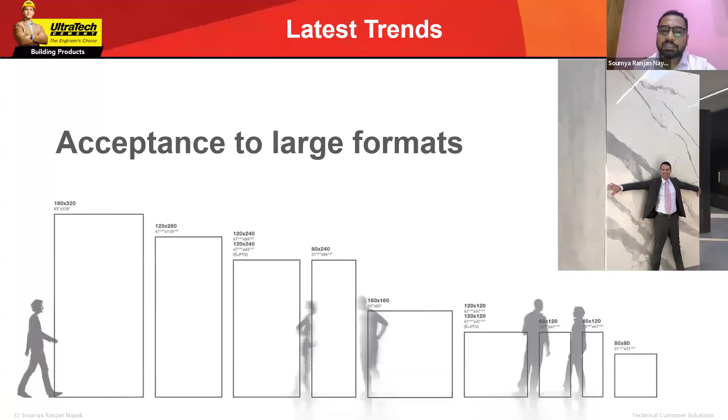So nowadays you barely see a home without tiles. Every second home constructed is now using tiles. So this is very important. We should know what our IS standard suggests for fixing these tiles and stones. So before that, we should know what types of tiles are available in the market.

So there are ceramic tiles which are very absorbent in nature for water. Then porcelain and vitrified tiles, they are non-absorbent for water, absorbing almost below 3% of water. Then glass mosaics, you see, these are the small glass mosaics, and they come with a traditional fixer to fix them. Let's take a laser. So presently these types of tiles are available in the market. For better understanding, I am giving you a view with glass. So glass is zero absorbent for water.

If you compare with ceramic tiles, they are mostly made of clay, so they absorb water more than 10%. But in case of vitrified tiles, they will absorb water less than 3%, almost non-absorbent.

So why am I elaborating this? Because we need a different kind of material to stick these tiles to the substrates. If a material is non-absorbent in nature, we require an adhesive capable of sticking this non-absorbent material to your plaster or any substrate where you want to fix the tile or stone. And if you see bricks and similar materials, they are very absorbent in nature, so we use cement mortar to fix these things. But when we come to a non-absorbent material, like a Sunmica board or plywood, they cannot be fixed with cement because they are very non-absorbent. Similarly, these tiles are also very non-absorbent, like vitrified tiles and porcelain tiles.

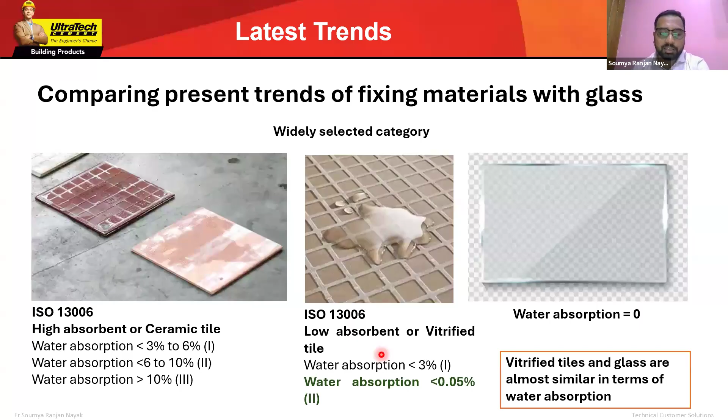Then obviously there are different types of stones available in the market - normal quarry stones, and there are composite stones also. We use different types of polymer or plastics or modifiers mixed with stone dust to give a composite kind of tile and stone.

Nowadays, the construction industry demands the fixing of tiles and stones on every kind of surface. Previously, as you saw and as we experienced, people used to fix tiles and stones only on cement surfaces, like plasters and concrete. But now, the construction industry demands that these tiles and stones be fixed on a plyboard, a metal board, an aluminium board, or a wooden surface. So we need different kinds of adhesives for this - we cannot say we will fix all these things with cement, because that is not possible.

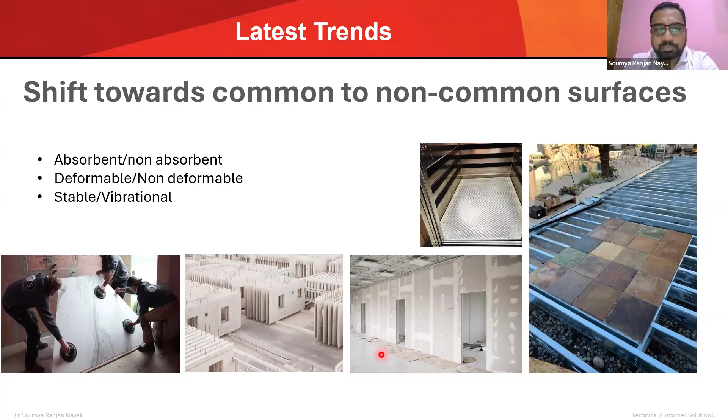So now you see the latest trend of tile fixing is like that. People are fixing tiles everywhere, in exterior, in interior, in any dimension. There are tiles like 10 feet by 6 feet - this kind of big tile is being used in construction nowadays. So for that we need a better solution and a modern approach.

Saying modern approach and better solution, we also have to look into cost effectiveness, because anything without cost effectiveness and durability is not a modern solution for now. If you see, we sent Chandrayaan, we sent Mangalyaan, and we placed it at a much lower cost compared to the Americans, Russians and Chinese. So what we need is a modern approach with durability, which will eventually be cost economical for our customer.

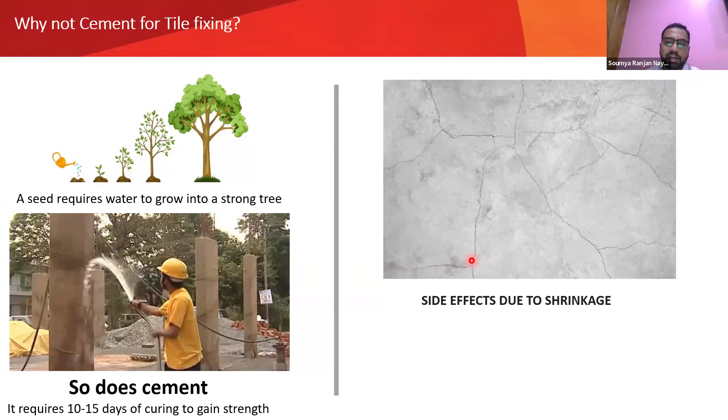So why not use cement in tile fixing? Because cement requires curing. When we do a plaster or concrete work, immediately after that we have to do 7 days or 14 days of curing as per the requirement of cement or concrete. If you don't do that, you will not get the desired strength, and in case of cement, we will get shrinkage cracks and other issues. So when we fix tile with cement, we are not able to cure it properly, and eventually it will lead to shrinkage cracks and other problems like hollowness, and we will not get the desired strength and adhesion. This leads to these kinds of challenges.

When you use only cement for tile fixing, you are not able to cure it properly because you apply tile on the cement or stone on the cement. So due to lower strength and shrinkage, buckling happens, and due to shrinkage and cracks in the cement layer, cracks eventually develop in the tiles. Due to gaps and hollowness in the binding material like tile adhesives, dirt enters into the gaps and into the white marbles and tiles. If the cement does not achieve its desired strength, our tile and marbles will debond, and we don't have control over shrinkage. If you don't cure it, this kind of lipping issue happens due to improper strength and shrinkage - hollow sounds occur, and from that point tiles and stones will crack, and due to gaps, water enters and efflorescence happens.

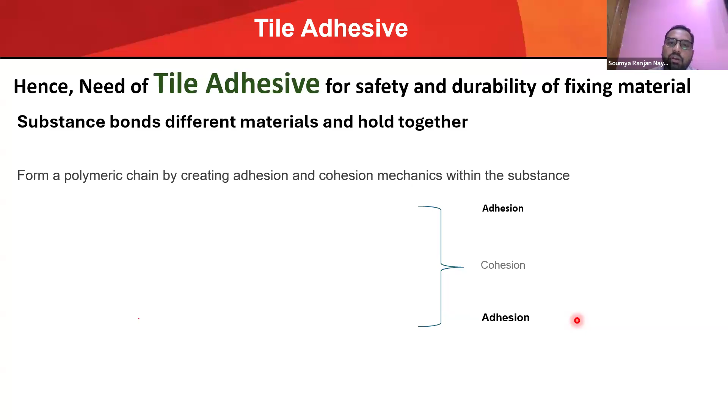our engineers must use tile adhesives for durable and more safer construction. Also, needless to mention that it will enhance the aesthetic of the building or construction.

And when I say tile adhesive, we will go into details. What happens? Tile adhesive will give an adhesion between the substrate and the tile.

Tile adhesive is a material which has a self curing technology. We know it requires no curing. Also,

it has zero shrinkage property. What happens? It will adjust its shrinkage at the time of hardening.

So that means at the time of laying the tile adhesive fresh, and when the tile adhesive gets hardened, the area will not shrink. The tile adhesive at the time of application, the area tile adhesive covers, it will remain the same.

Unlike cement or concrete, what happens? Cement or concrete somehow shrinks after 24 hours or after 12 hours. But tile adhesive, it will not shrink. At the time of application, the area it will cover, until the end it will cover the same area, it will not shrink.

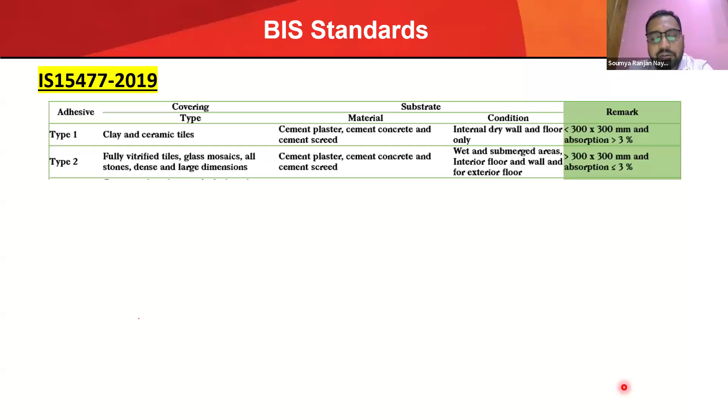so for type 2 tile adhesive, it says it will be applicable for tiles greater than 300mm,

and it's for vitrified tiles, glass mosaics, stones, and large dimension tiles in interior floors and walls and exterior floors.

I think... yeah, and exterior floors. So this is the exterior floors.

I will give examples like balconies and chajjas. These are exterior - sorry, like balconies are called the exterior floors.

Like verandas also, where the roof is there, covered floors. Okay, we can use type 2.

For type 3, it's the same kind of area we can use, but it allows for both external and internal walls. This is for all ceramic, clay, vitrified glass mosaic, porcelain tiles, and all natural stones. For sizes greater than 300mm, you can use this, but it should be less than 600mm for type 3. Type 3 is the kind of tile adhesive commonly used in regular construction, like institutional and individual house builders, because it's an all-purpose tile adhesive. You can paste tiles and stones in exterior and interior applications.

Let's see what our IS code says about these deformable tile adhesives. There are S1 and S2 types. S1 says the tile adhesive can deform from 2.5mm to 5mm. Type 1, type 2, and type 3 tile adhesives have a deformability between 1 to 2.5mm, which can differ. But type 4 must have a deformability capacity from 2.5mm to 5mm, which is S1. For type 4 tile adhesive having S2 deformability, it must show a deformability of greater than 5mm.

Then comes type 5. From type 1 till type 4, all these adhesives are meant for cement and dry substrate. But type 5 is meant for wooden, metal, plyboard, aluminum, stainless steel, mild steel surfaces, like in lift areas. In some constructions we use steel staircases - if you want to fix tiles or stone on a steel or metal staircase, we have to use type 5 tile adhesive. Till type 1 to type 4, all are cementitious tile adhesives.

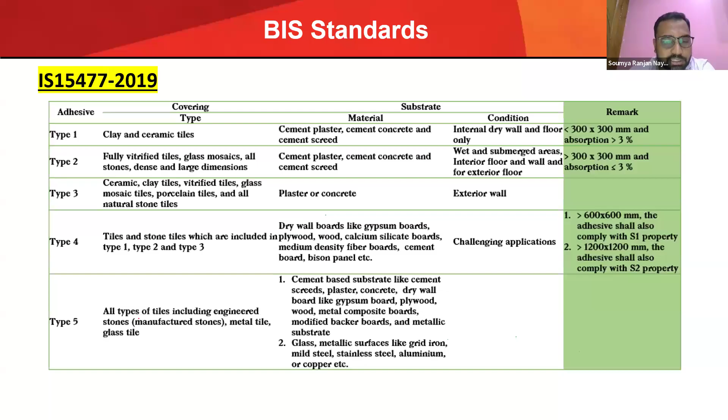I rather emphasize that we should know what are the types of tile adhesives as per IS code and what are the different applications. We must know this, because every construction or building is now using tiles and stones, and it's important that we suggest proper building materials for a better and durable construction.

Also, in some big projects they follow European norms, EN code and IS code. But now ISO is also there, though maximum construction has now moved to IS 15477. These are the synonyms summarized here. C1 is normal cementitious, C2 is improved cementitious.

There are some properties that must be there in tile adhesives, like slip resistance. Slip resistance means when you apply tiles, it will not slip. When you apply a tile on a vertical wall, it will not slip. If it will slip, it will be below 0.5 mm. That's the typical nature of a thixotropic material.

Let me take the laser pointer. Yeah, this is the slip resistance. It means when you apply a tile on a wall, immediately after application, the tile must not slip more than 0.5 mm. It's very difficult to measure with the naked eye, but this is the criteria a tile adhesive has to maintain.

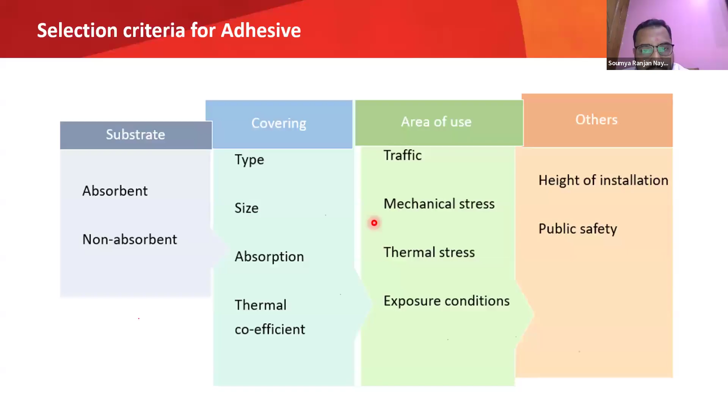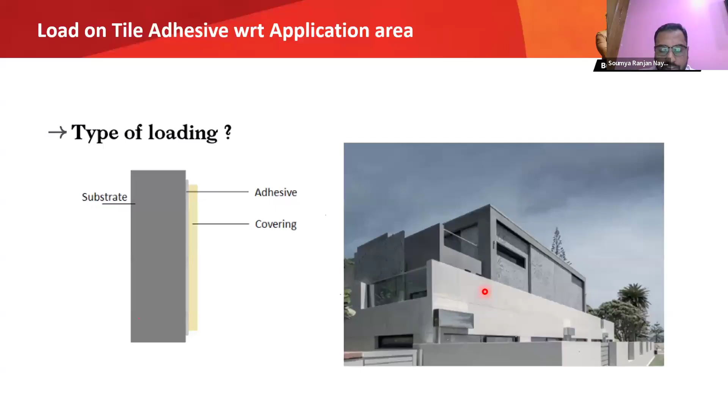Before that, what I told you, what our BIS standard specifies, is the types of tile adhesives I mentioned earlier. Now I am showing you what BIS certifies - what is the minimum tensile adhesion and shear adhesion that will be there. So for type 1, in dry condition...

The 0.5 Newton per square millimeter will be the tensile adhesion, and for shear it will be 1. For type 2, dry and wet condition it will be 1, and shear it will be 1.25. You can also see here heat aging condition and wet condition. So from these things, as per our requirements, we can choose the type of tile recommended by the BIS code.

I will show how we do the testing for this adhesion. Generally, the open time testing is done by only fixing the tiles, and after 30 minutes we will see how the tile adhesive is in workable condition or not. So as I earlier mentioned in the BIS code also, these are the direct words from our BIS code I am showing here.

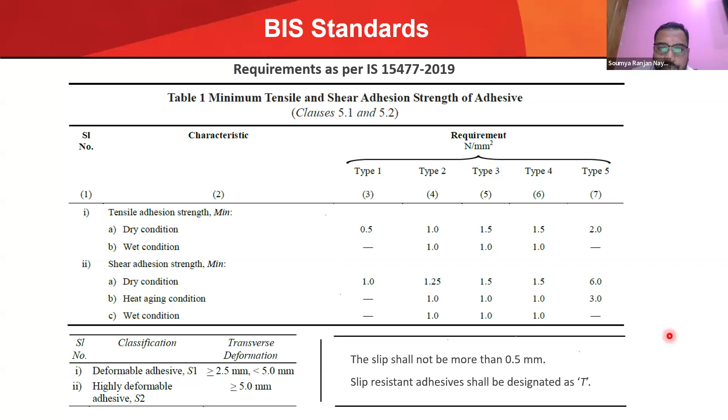Yes, these are the notch trowels. If you can see here, this is giving a more clear picture. See, when we run this trowel, it will give this kind of notch. It will help to lock the tiles in the substrate. Okay.

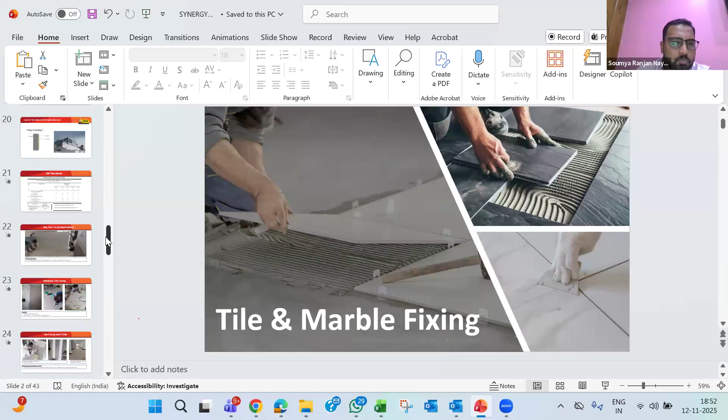So big tiles are now being used, and if you see in the middle picture, in the gaps between the tiles, we fix the spacers and fill the gaps with epoxy tile grout. These are heat resistant, water resistant, and chemical resistant. They are also food grade.

So what happens? It will resist any kind of chemical, dirt, or water entering the substrate, like your floor. It also works as an elastic membrane between tiles, so it also takes care of the expansion and contraction of tiles and stones. These are the tile grouts in between. Tile grouts come in different colors; you can choose any color as per your requirement. Here he is using this golden color. Okay. Now I'm showing a video.

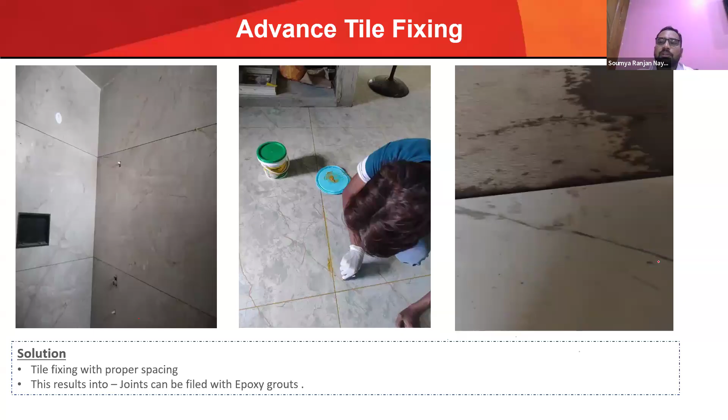So I am showing some projects. This is a Marriott hotel project. This is a Ram Mandir in Bilaspur, a famous mandir which recently opened during Durga Puja, and one of the Shankaracharyas came for 3 days here. Here you see a polyurethane type 5 tile adhesive used to fix these aluminum panels on the walls and tiles.

Here there are different types of stones written with Ramcharitmanas and Hanuman Chalisa and all these things. They are fixed upon the white cement wall in this mandir. So these are the advanced construction materials we use for different types of requirements. Okay.

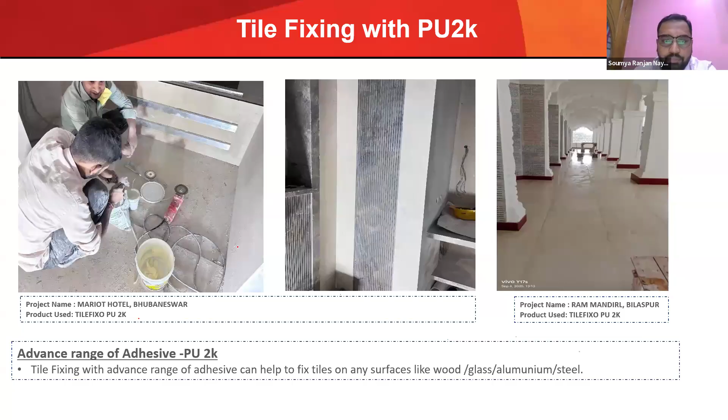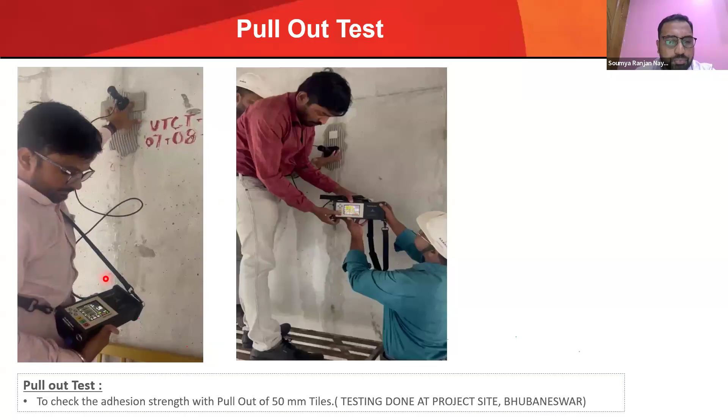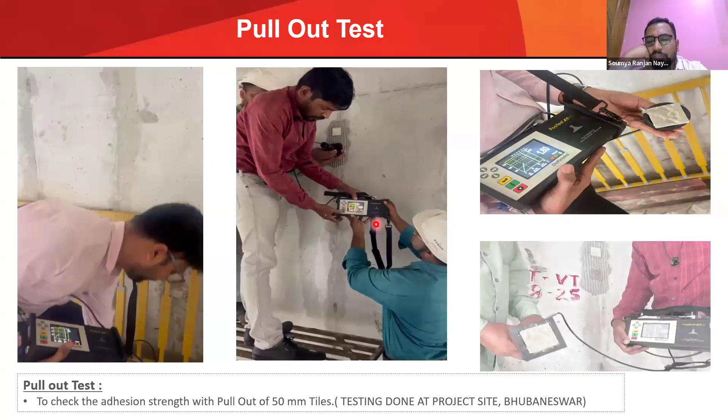This is how you see how the tile debonds from the substrate and the tile adhesive breaks at 1.30. Okay, this kind of test we do to ensure the strength of tile adhesive. Okay.

These are some recent projects where it is used in Odisha and nearby areas. You can see hospitals. This is Capital Hospital, Z1 Estate, Royal Heritage, Sambalpur, Sky City.

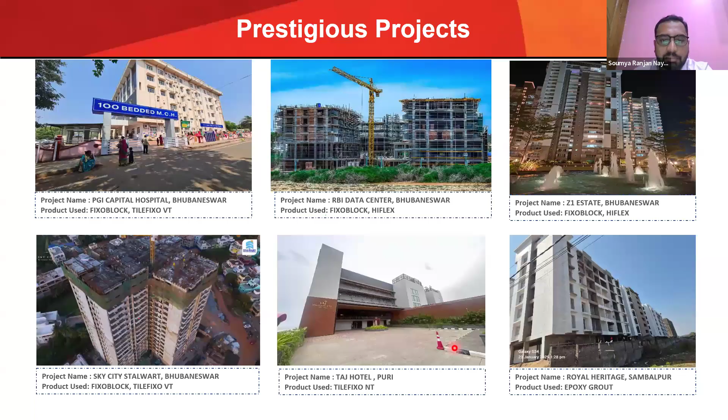Okay, recently at Taj Hotel Puri, we have used tile adhesive. These are fixed with tile adhesives. So the different aesthetic stones you see applied outside of a building are fixed with tile adhesives only. Okay.

So let's move towards waterproofing. Again, waterproofing is a very vast subject. We used to do a 6-7 day course on it. But in waterproofing, I will only touch on the very basics, only for new constructions: why waterproofing is required and what are the areas where we will do waterproofing.

Like tiles, I told you all the IS codes, what are the types of tile adhesives, and how we use tile adhesives and all these things. In waterproofing, I will just explain in which areas you should use waterproofing.

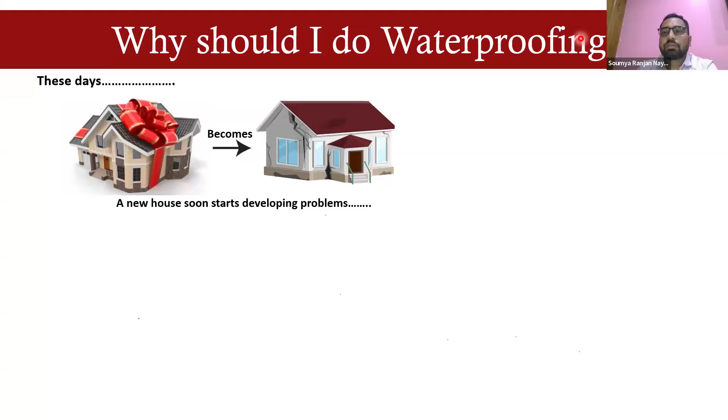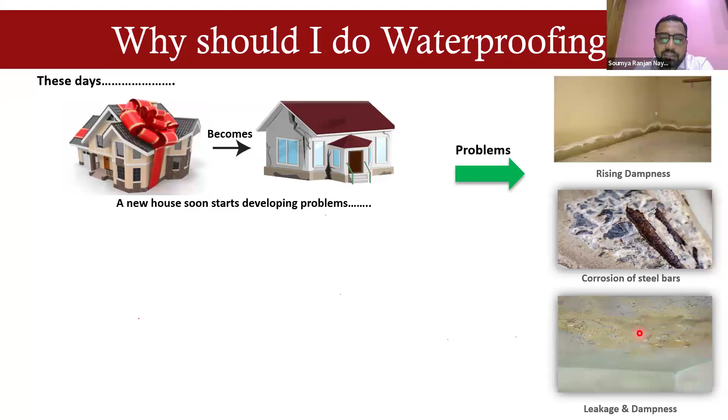So how will this go? In, I'd say, 4 out of 5 homes there will be problems like this: waterproofing problems, rising dampness, corrosion of steel bars, leakage, and dampness. Even if there is no structural damage in the structure, the water will enter into your structure and make the durability, or the lifespan of the structure, less.

Maybe climatic change and fast speed of construction, lower time. So how to avoid these things in waterproofing? There are external factors beyond our control. Even if we choose proper material, proper vibration, and proper construction method, there are many external factors beyond our control, like shrinkage cracks. They may naturally develop in cement, and through these cracks water may enter the structure or building, and corrosion happens, efflorescence happens, all these things.

Thermal cracks due to temperature variations. You see, India has temperatures from 0 degrees to 48 to 50 degrees. These kinds of temperature variations also lead to thermal cracks, and these cracks may let water enter the structure and develop structural cracks. So what is the solution? We have different types of waterproofing materials. In new construction we have to do two types of waterproofing: one is integral waterproofing and another is layer waterproofing.

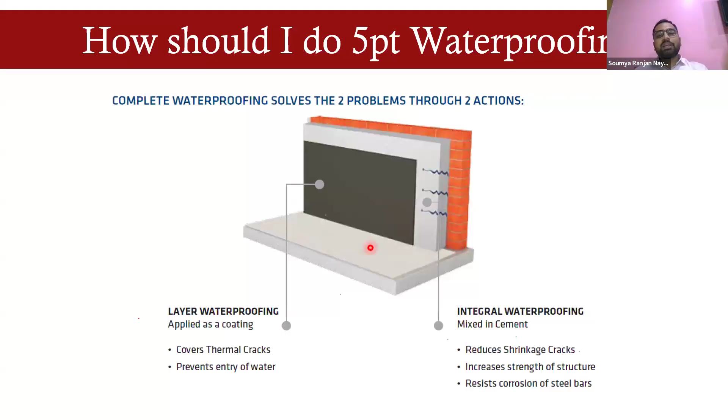And layer waterproofing, as the name says, is a layer. As we use masks for prevention from corona, we use a layer over concrete or walls to prevent water entering the structure. These are elastic layers, and we have to choose the material as per the vibrations and thermal expansion and contraction. In general, in new construction, integral waterproofing and layer waterproofing are enough. So in which areas of the building do we have to do waterproofing?

I will just explain these 5 points. The first area is below the ground. At DPC level, water rises through capillaries, and capillary rise gives groundwater a path into the walls, leading to problems like erosion. To avoid this, we have DPC waterproofing, a bitumen layer. You apply this bitumen layer over the DPC level before ground filling, and it acts as a preventive layer between groundwater and your substructure.

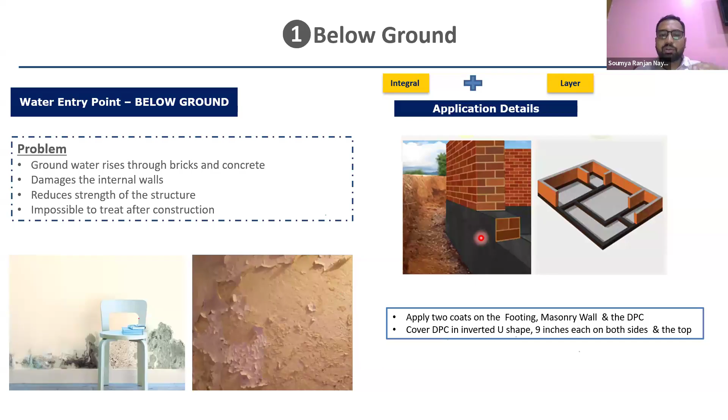So it will block groundwater from rising through capillary force into your substructure. This is foundation level, DPC level waterproofing. This is point one. Here we stop groundwater from entering our home.

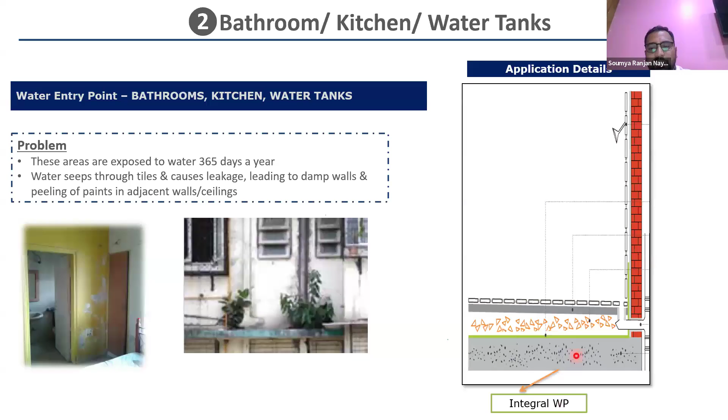For bathroom and kitchens, these are water-prone areas where more water pipes are laid. So for bathroom and kitchens, we must do integral waterproofing in the bathroom slab. Then there is a layer waterproofing we have to do before applying tiles, or better, before applying plaster. Different types of layer waterproofing are available: cementitious and resin-based layer waterproofing.

We can apply this waterproofing layer over the brickwork or the plaster, as shown by the arrow, then apply tiles. This will seal the water from entering the structure and prevent the kind of nasty things you see after 1 or 2 years of construction in every home. When bathroom water leaks outside, fungi and other organic growth develop in the structure, weakening it severely. So this is the second area we should do waterproofing after the DPC layer waterproofing: bathroom and kitchen.

Obviously, the roof is exposed to direct water. When water moves through the pores of the roof and seepage happens beneath it, it corrodes the reinforcement. With corrosion the steel expands, and due to the expansion, concrete spalling happens, leading to different structural failures. Even after 4 or 5 years, we may have to demolish the entire structure, because if the roof is in structural failure condition, the life of the residents comes into stake.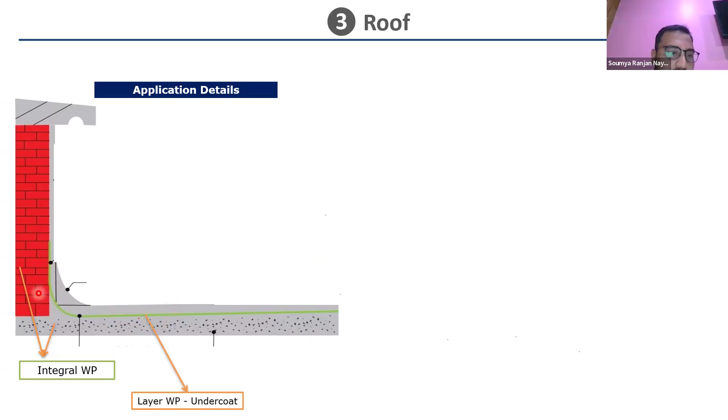So in the roof area, what kind of waterproofing do we have to do? Again, we have to do integral waterproofing in the roof and apply layer waterproofing over the roof and the parapet wall. Then apply a skidding layer over it to protect the waterproofing layer. There are also different types of layer waterproofing available where you don't have to do any skidding over it. So we have to do waterproofing in the roof area.

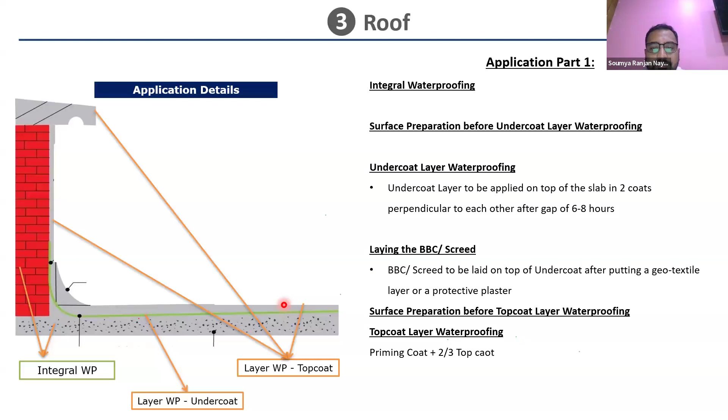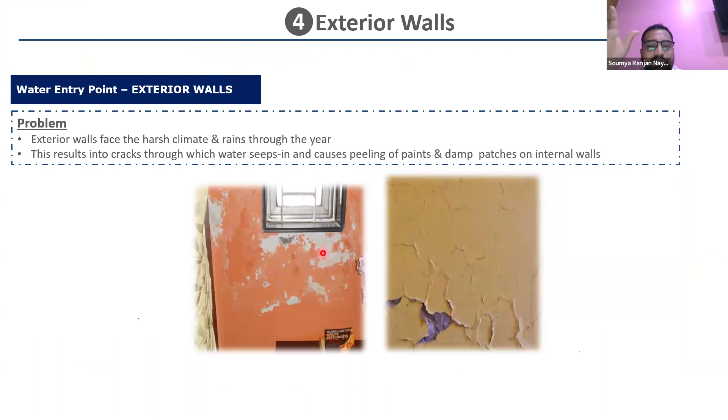For exterior walls exposed to rain and extreme harsh climate areas, you can do exterior wall waterproofing. But I think exterior wall waterproofing is required mainly in areas where plumbing pipes are on the outside. So only in these areas is exterior waterproofing needed; in other areas, you don't need to do exterior wall waterproofing.

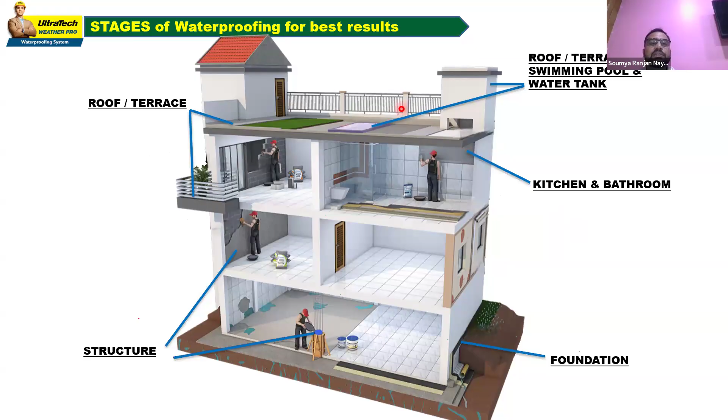So these are the areas as I explained. In summary: in foundations and structures, we have to do integral waterproofing. In kitchen and bathroom, we have to do layer waterproofing. In terrace, roof, and swimming pool, these are the key areas where you have to do waterproofing. These are different products available in Ultratech. I don't want to emphasize the product, you just need to know that there is bitumen-based waterproofing for DPC foundation level, integral waterproofing for columns and beams, and cementitious and acrylic-based waterproofing for roofs and balconies.

The objective is to talk a little about the transport system, the road network available in India, and the benefits of a good transport system.

Once we cover that, we will talk about soil stabilization in particular, its use in flexible pavements, and its benefits. Finally, we will end the session with a case study on BC soil, which is also one of my PhD topics.

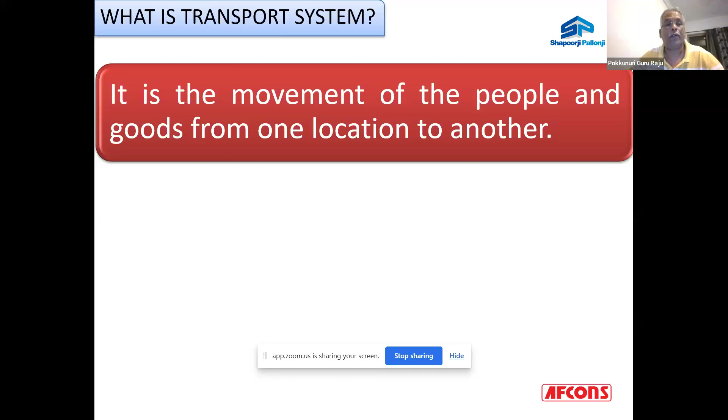To start with, the transport system is basically the movement of people and goods from one location to another. There are four major types of transport: rail, road, air, and water.

In this session, we will be talking about road. The road is divided into flexible pavements and rigid pavements, and in our case, we will focus more on flexible pavements only.

If you see the growth of the road network in India since 2014, the initial rate of growth was 12 kilometers per day, which moved up to 29 kilometers per day in 2024-25, after touching a peak of 37 kilometers per day.

What does 12 kilometers per day of road construction mean? It means that much data, that much resources, and that much material are being consumed in the construction of the road network alone.

With the advancement of Bharatmala, national highways, and expressway networks, the demand has grown exponentially, and people have started seeing the benefits of good road networks.

I remember during my initial days we used to travel on a two-lane road, which at that time was called a national highway. By 2000, that two-lane was converted into a four-lane, and that four-lane itself was a magic for us. But now, in today's scenario, that four-lane has become like a two-lane, and we are expecting six-lane and eight-lane roads.

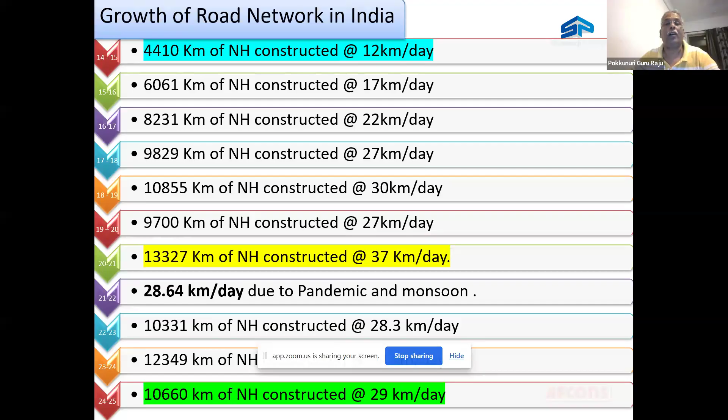These roads will connect the metro cities and the intermediate cities to boost the transport system. This is the level of growth which is expected. And if you see the benefits of a good road transport system, you definitely save time in traveling.

You have better freedom to travel, and your dependency on specific modes of travel is reduced—earlier we depended more on trains, which has reduced drastically nowadays. People can plan immediately and choose any road to reach their destination much more easily than before.

If you take note of the benefits we normally get, we have already started getting them: increased speed of construction, increased speed of connectivity, reduced vehicle operating cost since there's little activity besides controlling the vehicle in cruise mode, and saving lots of time for passengers moving from one location to another.

Reduction of accidents is of course a debatable point, because sometimes even a good road can become the cause of an accident. But that type of accident is not generally seen on a two-lane or single-lane national highway.

It also increases comfort levels, better national integration, and national security, because as you increase the speed of movement, you decrease the risk of not achieving any particular goal.

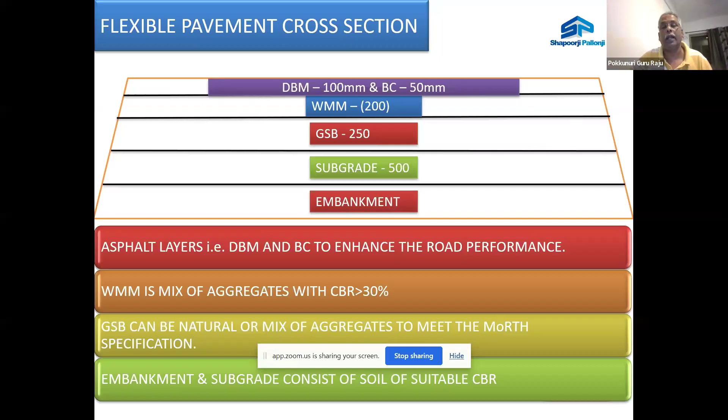So then there is a need for how to build a sustainable road without consuming much of the naturally available aggregates. Or alternatively, how to build good quality, durable roads with minimum use of naturally available aggregates.

If you see the quantum of materials required for different thicknesses of DBM, BC, WMM, GSB or subgrade, a total of 42,252 metric tons of material is required for making a 6-lane road. This is the quantum required. Now multiplied by the length of the road, it's going to be huge.

So that means you cannot neither stop building the road, nor can you ignore the availability of material suitable for constructing a particular road. So the challenges in today's road construction, if you see, is the increase in construction speed from 12 kilometers per day to a current rate of 29 kilometers per day, touching a peak of 37 kilometers per day.

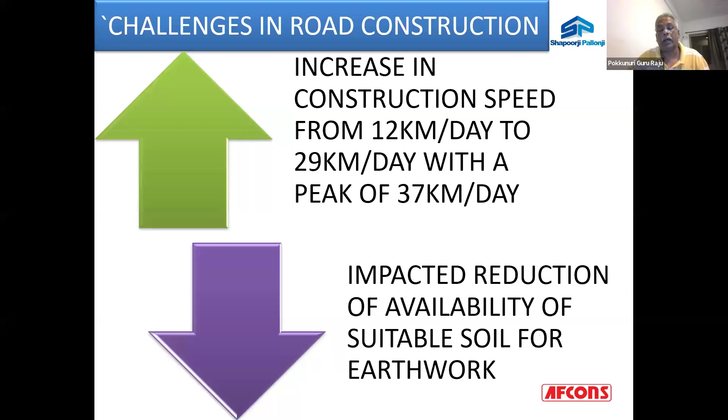That means it has already constructed so much road and consumed the available natural aggregates. Now the balance remaining will be very marginal, which is going to create difficulty in reaching the required quality parameters to build sustainable, durable roads. So this has impacted the availability of suitable soil or aggregates.

Now, in order to address these challenges, the best option is to have an optimized pavement design itself, which will lead you to options like using unsuitable soils in road construction, or using the existing in-situ soils to their maximum required level, so that you will get an improved CBR, because CBR is the basis of the pavement design.

If you look at the IIT PAVE model of flexible pavement design, which is a 3-layered structure, you have a subgrade layer where you get the effective CBR calculated and submitted as an input for the flexible pavement. Then you have the E values and Poisson's ratios of the GSB or WMM layer, acting as a single layer, and then an asphalt layer where you put the MR values and Poisson ratios.

So the idea is, when you improve your CBR, what happens to the other parameters — whether the road being constructed, when evaluated or analyzed using IIT PAVE, is safe in terms of rutting and fatigue parameters as mentioned in the design calculations, or it is failing to achieve those things.

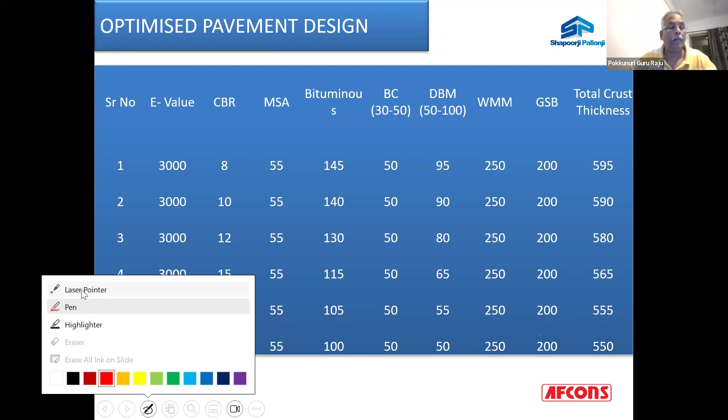If you see this first column just after the serial number, that is the E value or the MR value of the asphaltic layer or top layer. If you fix that layer thickness, say at 3000, and start doing calculations on IIT PAVE, you start with your CBR of subgrade, effective CBR. In this particular case, I'm taking the effective CBR only.

When you see the effective CBR moving from 8, 10, 12, and 15, if you look at IIT PAVE, your effective CBR of subgrade should not be more than 15, because even if it is more than that, it is not adding value to the mix design, since the deflection value or K value is fixed at 100 MPa there.

So forgetting about that parameter, if you increase your CBR from 8 to 20 for the same MSA, you can see your total crust thickness reducing by 5 millimeters. 595 becomes 590, 590 becomes 580, and so on up to 550. Meaning, when you increase your effective CBR of subgrade by 2%, your total crust reduces by 5 millimeters.

Now, which one is the costlier material in this case? Of course, the bituminous layer is the costlier material. If you see the next column, we have reduced the bituminous layer, that is DBM, by 5 millimeters each. When each layer of bitumen is reduced by 5 millimeters, the quantity of binder used is reduced, meaning less production is required to build 100 kilometers of road, and of course the aggregate part also.

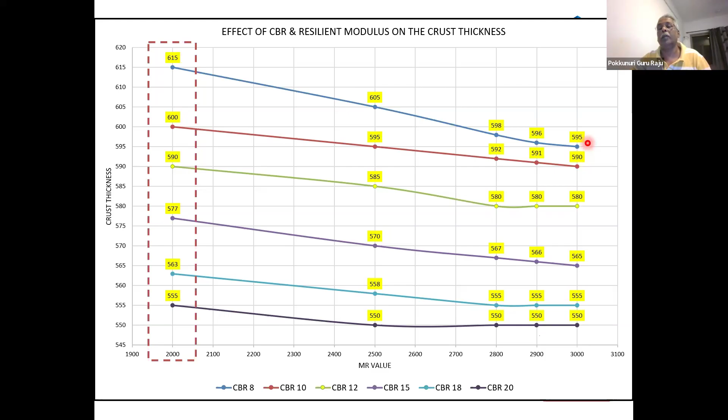So I will skip that slide because that is similar to the previously shown slides. So that is what I am trying to skip.

Now, when you talk of improved CBR, for example, I have just taken one example wherein I tested a soil of Fatehpur, which is having an original parameter: silt plus clay is 56.87%, with an MDD of 1.873 and OMC of 13.74. The control soil sample has a CBR of 8%.

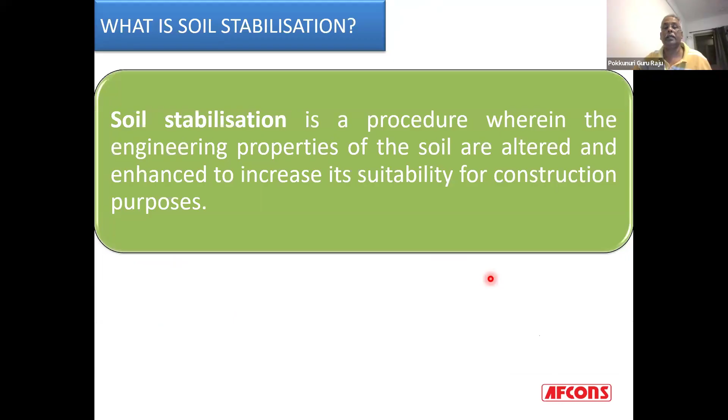So soil stabilization is a procedure wherein the engineering properties of the soils are altered or enhanced to increase their suitability for construction purposes. Soil stabilization is a controlled modification of soil structure and the physico-mechanical properties of the soils. The major reasons for performing soil stabilization include: it improves the strength, it achieves dust control, it also acts as a waterproofing material, and it promotes the use of waste material in construction.

It all depends basically on how you are going to do the soil stabilization, because it's not always possible that your natural soil will meet all the requirements. Sometimes the liquid limit is more, sometimes the plastic limit is more, sometimes your free swelling index is beyond your control. So the stabilization will not only increase your CBR, but it also has an impact on the other engineering parameters like the Proctor values, the liquid limit, the plastic limit, and so on.

So there are different methods available. We have a standard wherein you can see different methods available, like biological soil stabilization or physical soil stabilization. We call it a mechanical soil stabilization, and also we touch upon the chemical soil stabilization.

When we talk of biological soil stabilization, it is achieved through afforestation or planting, and its main purpose is to control the erosion, which we normally do on the sloping portion of the high embankment portion. That is also a type of stabilization only, because we are trying to control the erosion. Because water is such an element which reduces the shear stress between the particles, and once the shear stress goes low, the movement gets faster when it is on a sloping surface.

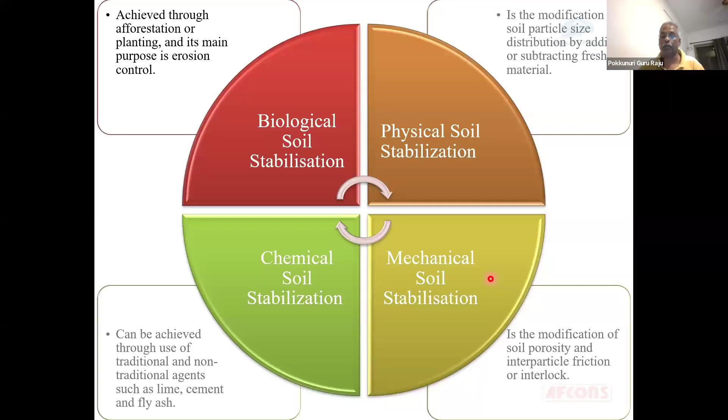So cement is one type of soil stabilization where you can add cement ranging from 0.1 to a maximum of 2%, or you can go beyond that also in some cases where we need the UCS values also to become a parameter to consider. But at any point of time, we have not used more than 3.5% cement to achieve the required CBR. CBR you anyway get by adding more than 1.5%.

But generally, the higher cement is required only in case when you are supposed to address the UCS values also being a requirement. Generally, it ranges between 1.25 to 1.5. It should be more than 1.25 to 1.5 for highways and expressways. So for that particular reason, you need to go close to 2.5% of cement stabilization. But the purpose of the stabilization is again the same thing. The method of stabilization we will be discussing in the different sections.

Now, in this particular case, we will just touch upon the different types of additives or minerals I have seen, and some of them I have used in soil stabilization. Fly ash, it's again a byproduct of the thermal power plant, which can be used as a stabilizer. Pond ash is generally used as an embankment material, so it is a lightweight material having MDD not more than 1.3, 1.4.

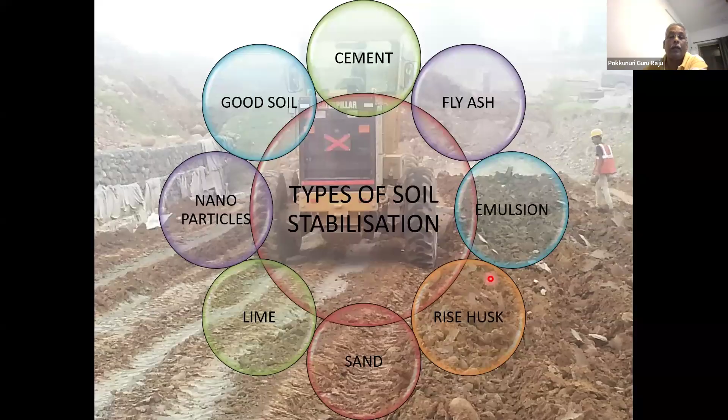Now, when you talk of the process of soil stabilization, this is how we normally do it on sites. We make grids of the entire road which needs to be stabilized. We lay the soil which is not suitable, do a plain pass, prepare a grid, and then put the cement bags on top of it. The cement bags calculated for each grid are placed in position and then spread out.

The idea is, theoretically, you are assuming it is 0.1%, 0.2%, 0.5%, 1% or 2%. But how are you going to ensure that in the field? So there needs to be a procedure in place when you are doing soil stabilization. The first step is the grading, the second step is the calculation, the third step is placing the bags as per the grid lines, and then open the bags and spread it across.

This is a method which is generally manual in nature. You also have equipment available wherein you can use the right doses. You can calibrate the equipment for the different types of doses you want for the stabilization. And then instead of placing the bags, you can run the equipment on top of the soil, which will do the harrowing and mixing. So this step of manual spreading can be eliminated when you use a mechanized way of stabilizing the soil.

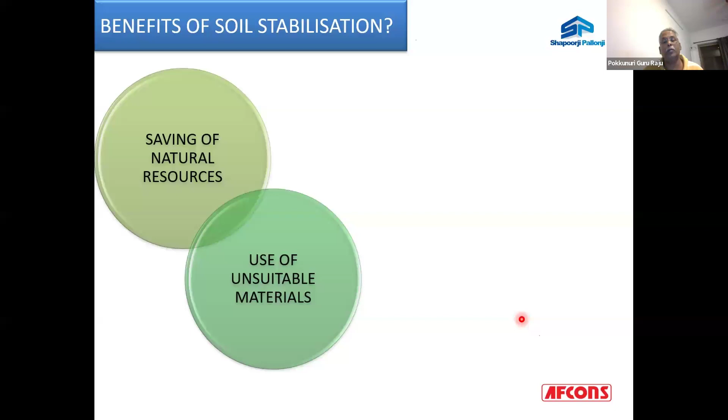So use of unsuitable materials - this will add value to help people understand that there's nothing called unsuitable material. Any soil can be stabilized and used in road construction. So the terminology of unsuitable soil can be eliminated permanently from the course. Rather than talking about unsuitable soil, we can focus on how to make it suitable, so that the terminology can be used in a positive sense.

And then, of course, you have the improved durability aspect. If you can add rut resistant materials, you can add UCS values and UCS parameters to ensure there is an improvement in the durability of the roads, and roads are not affected because of the percolation of water from different cross sections.

Then you need to adhere to the timelines, because generally people lose time searching for good materials, whereas if you know you don't need to search, you just need to rip the available material, test it, arrive at a parameter, choose the methodology for stabilization, and then do it. Then there is nothing called time loss.

You only need to plan your work so that your curing period is adjusted with the other activities, and you are able to execute the work with maximum benefits. Generally we talk of 4 or 5 days of curing, though the standard specifies 7 days. But even if you do at least 4 or 5 days, it's going to help you a lot.

Because for that 4 days curing required for a particular stage, what is more required is to have 4 sections ready for stabilization, so that by the time you complete the fourth section's stabilization, your first section will be ready for the next layer. In that sequence, you will never lose time waiting.

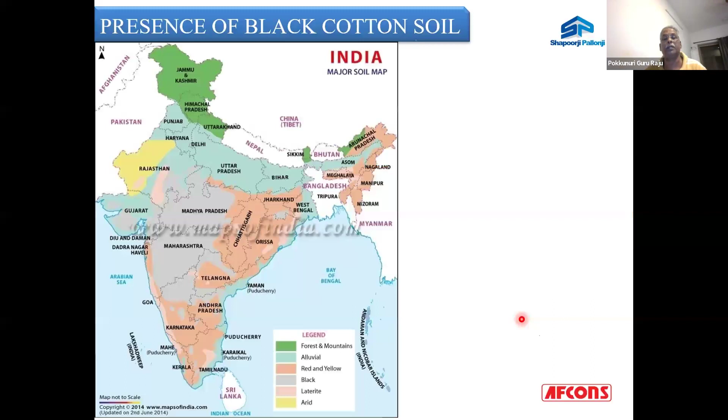Now, coming back to the stabilization of BC soils, this I have taken as a case study, because BC soil is present widely in India. If you see the graph, the gray color represents BC soil, which is present in Gujarat, Madhya Pradesh, Maharashtra, parts of Goa, Karnataka, Telangana, and Andhra Pradesh, and some parts of Jharkhand, and not in Orissa. The beauty is 20% of the total area is captured by the central and western parts. The rest is Deccan Plateau and Maharashtra, Madhya Pradesh, and Gujarat.

Why are they known as black cotton soil? Because generally you grow cotton extensively in such types of soils.

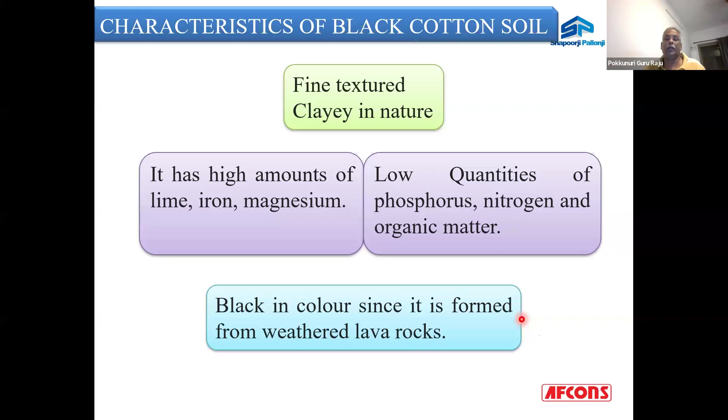Now, if you see the typical characters, because that is the aesthetic part which we talked about, but when it comes to the engineering part, the typical characteristics of black cotton soil are fine textured clay in nature. It has high amounts of lime, magnesium, iron, with a low quantity of phosphorus, nitrogen, and organic matter. It is black in color because it is formed from weathered lava rock, which gets burnt out and then stored in such a way that the color becomes black.

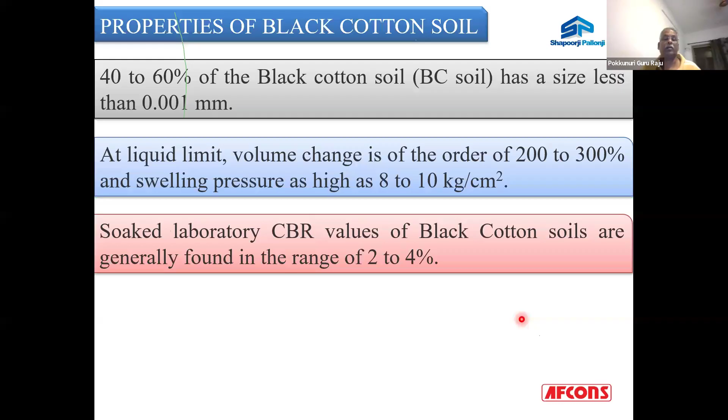40 to 60% of your black cotton soil has a particle size of less than 0.001 millimeters. The liquid limit volume change is of the order of 200 to 300%, and the swelling pressure is as high as 8 to 10 kgs per centimeter square. This is what we have tested for 70% FSI materials, and then soaked 4-day CBR of these black cotton soils, which is found widely in the range of 2 to 4%.

Now, because of its low CBR values, excessive pavement thickness is required for designing in case you intend to use these BC soils in flexible pavement road construction. But we have a statement that whenever you have a BC soil, your OGL needs to be ripped by 2 layers, that is 500 millimeters, and then you can proceed with fresh material laying of 2 layers. That means you need to remove and replace 2 layers of BC soil if you want to construct a flexible pavement on top of the BC soil.

Now, what exactly is the challenge seen in the case of BC soil is that black cotton soil is very hard when dry, but it loses its strength completely in the wet condition. If you test the unsoaked CBR of the BC soil, it is in the range of 24%, for a sample which has a free swelling index of 70 to 75%. So when the same sample is tested for 4 days soaked CBR in laboratory conditions, the CBR value is 1.8%. That means the same soil, which generally has a range of 24% CBR, drops to 1.8% the moment it gets in contact with water.

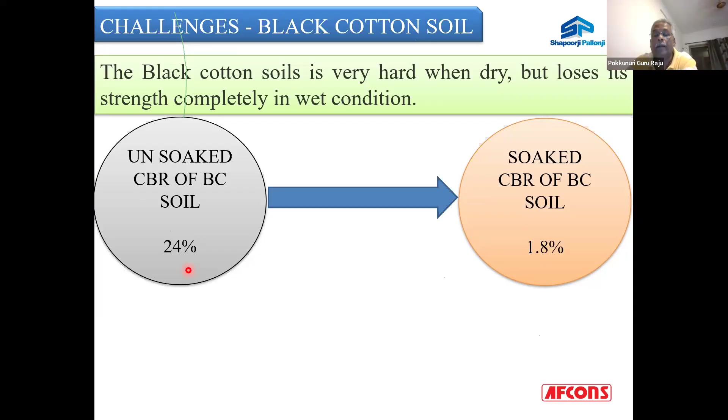So this has given me an idea. The major culprit of this soil being categorized as unsuitable soil is not the soil, it is the water. If you are able to neutralize the action of water on the BC soil, whether it is soaked or unsoaked, your CBR will remain 24%. So this is the idea which has started, and we try to work on, and then we could find some materials which are useful, and that is what will be discussed in the next upcoming slides.

So black cotton soil is highly expansive in nature when it gets in contact with water, thus making it unsuitable for construction. Because of its high swelling and shrinkage characteristics, the black cotton soil has been a challenge to the highway engineers.

Now, you have issues, you have challenges. The challenge is when it is wet, the black cotton soil has a problem with the strength part. So when we talk of strength, it is basically the CBR we are talking about. If it is only strength, you can deal with it using lime and cement stabilization or any other mechanical or chemical stabilizations like fly ash and all. But in the case of black cotton soil, strength is not the only criteria which is low.

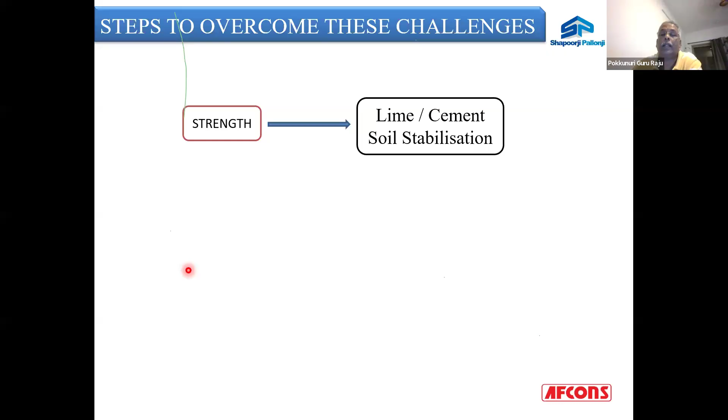It is the nature of the soil which is expansive in nature. Now I need to address this expansiveness also if I want to achieve the results, if I want to achieve the outcome of soil stabilization as the perfect, suitable, or approved one. Now, how do we address that? How do we change that expansive nature? The only way to change that expansive nature is you need to coat the particles of the black cotton soil with a chemical which will change the nature of the soil particles, from hydrophilic to hydrophobic.

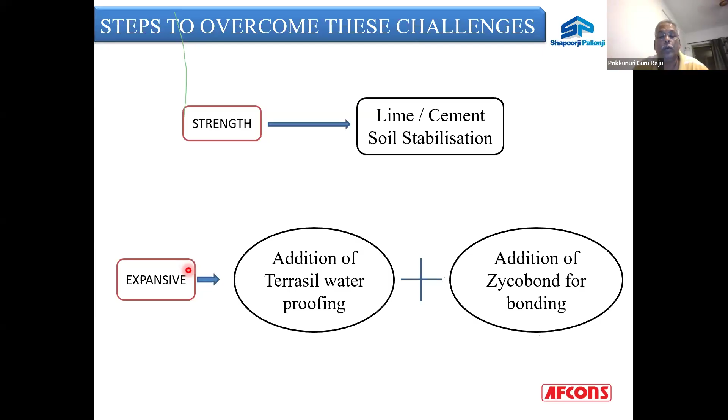So basically you are supposed to neutralize the effect of water on the soil particles. These are the two materials, two types of chemicals being used during these studies: one is terrasil and the second is Zycobond. Terrasil is basically a silane material working as a waterproofing material, and Zycobond is a polymer which tries to bond the two soil particles. So when it comes to black cotton soil, we need to work on both strength as well as the expansive nature of the soil. So we started our studies using a combination of lime and chemicals, which is organosilane-based nano materials for waterproofing and acrylic copolymers for developing the bonding.

Now, how does that chemical work at all? Normally you have minus OH groups, which make the surface water-loving in nature, hydrophilic. What terrasil does is create a bond with the OH group on the surface of the soil particles, creating a nano siloxane, alkyl siloxane bond, the SiO2, which acts as a water repellent. The size or layer of this particle is 4 to 6 nanometers.

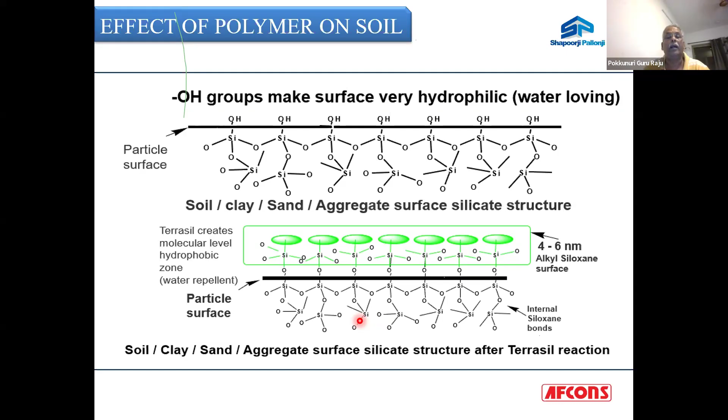So this is what is being done during the research. If you see, there are materials like lime, Zycobond, terrasil, and the BC soil. This is of course the oven dried BC soil, that's why the soil looks different. Now what is required is you get lumps of soil, and it needs to be dried, otherwise you will not be able to break it.

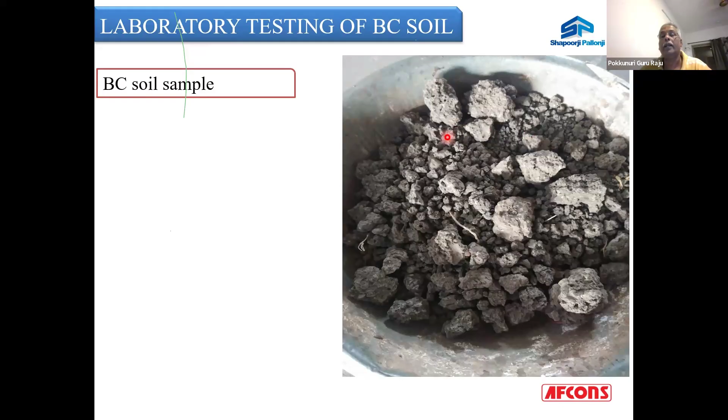The first step is you need to mallet it, break it down to the smallest size possible. The idea is we work on a soil particle size limited to 10 millimeters max, not more. That ensures that if 10 millimeter particles are being coated, anything within that is not getting coated, and you need to ensure that when it goes as a lump of particles collected together as 10 millimeter particles and laid on the surface, your particle to particle contact is not getting crushed much, and even if it is, your surface is not exposed to any leakages.

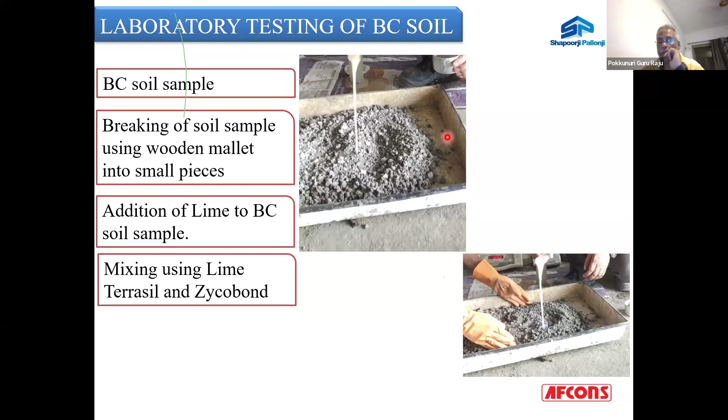Now, once you crush it, you need to add the lime on top of it, depending upon the design calculations, and then add terrasil and Zycobond one by one. Once you add terrasil and Zycobond, you can check the availability of the water, the moisture level, because that is what is required before casting the proctor molds.

Now what we have done is we tested for 7 days curing, 4 days curing, 14 days curing, 28 days curing, and also 56 days curing. The more you allow it, the more the CBR is.

And this is a process which is irreversible in nature, so you need to be careful when adding such chemicals to the materials which need to be supplied, because if it is a temporary road and you want to revert it back to its original tropical crop seasons, it's not going to work that way. So this is the limitation of this particular study, which one needs to keep in mind before applying such chemicals for their work.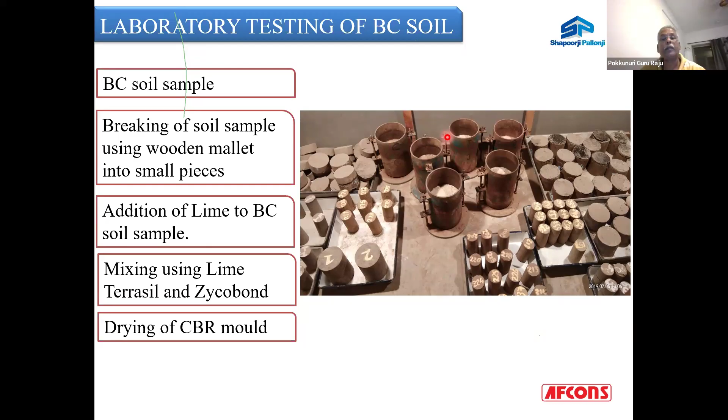Then you can go for the testing of the CBR for that particular mould. Now the beauty is you can demold and then put a drop of water on top of it. You can see the crystals of water here. This is the black cotton soil which is created using a proctor mold and then demolded, and on this particular side face, not on the top but on the side face, just to ensure that throughout the depth it is properly compacted and properly coated. You can see the drops of water shining like crystals. So this is basically giving you an indication.

This is being tested in the year 2019, if you see the timestamp there. So this has created an eye opener to the others.

How do we test it? How do we implement it at site? Because it's very easy to work in lab conditions, but most of the time we get challenged to do the same work in the field because of lack of space, lack of resources, or lack of availability of opportunities. Since we are from the industry, we get those opportunities also. Apart from the lab trials, we can do the field trials also, and that's exactly what we have done once we finished the lab trials.

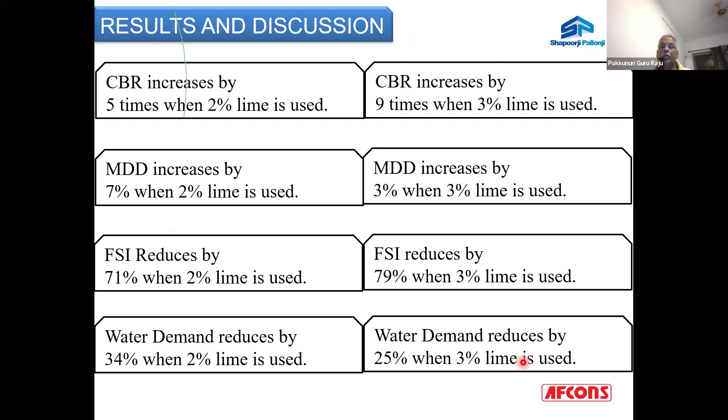Similarly, you can observe that your MDD has also gone up, your FSI is reduced, and your water demand is also reduced from 34% when 2% lime is used, to 25% when 3% lime is used.

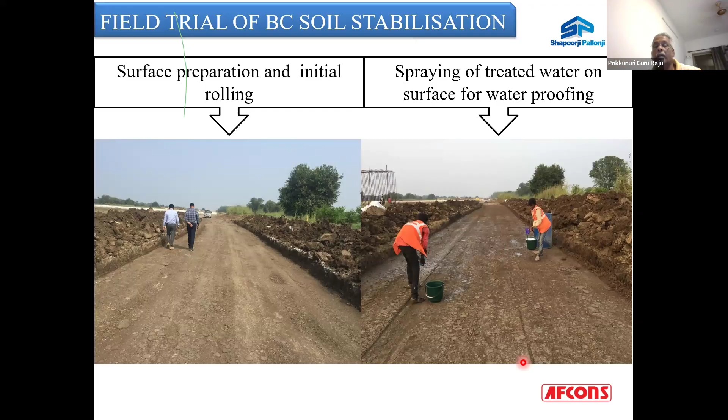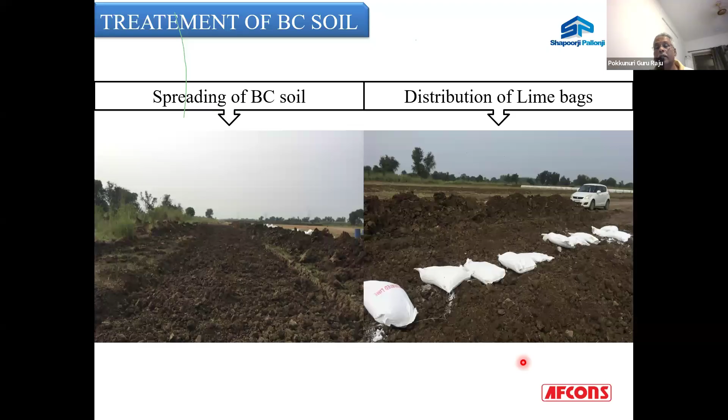So if you look at the field trials of soil stabilization, you can see this is the BC soil bed, which was removed and plain passed, made ready to be used. We sprinkled the Terrasil material on the bottom to ensure the bottom is completely water cured and nothing is penetrating from below. Then you put the layer already taken out from the same place and spread it across. You can see the color of the soil here, which is an indication of the FSI we are having. So what is required is spreading the BC soils, then spreading the lime bags in place, and then spreading the lime manually because it's a small section of 50 to 80 meters, which we used for trial purposes.

And then you repeat with a JCB, but ideally it is better if you go for a tractor with a ripper and rotavator arrangement, because the ripper will help you break the soil and the rotavator will help you mix the soil. It's always better to mix the lime first, using the rotavator, so that the soil is broken and coated with lime, and once coated with lime you can use your chemicals to coat the complete soil.

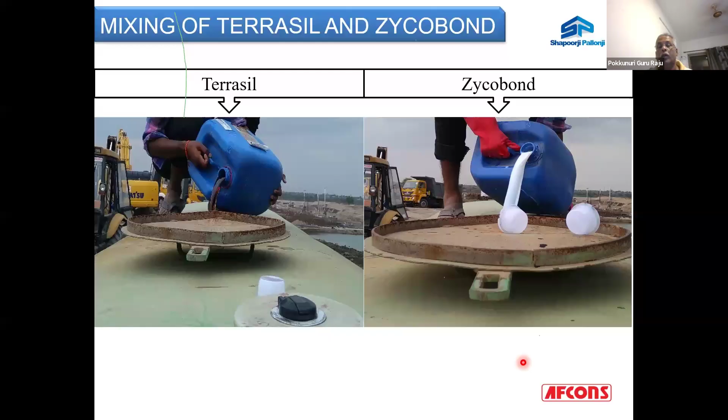So this is how the rotavators are used to break the soil, and then you can add the Terrasil as well as Zycobond into the water tankers directly, which are used for spreading water up to the required level, that is OMC. Then you spread it behind the spreader, move the rotavator to mix it, roll it, allow it to dry for some time, and then test it.

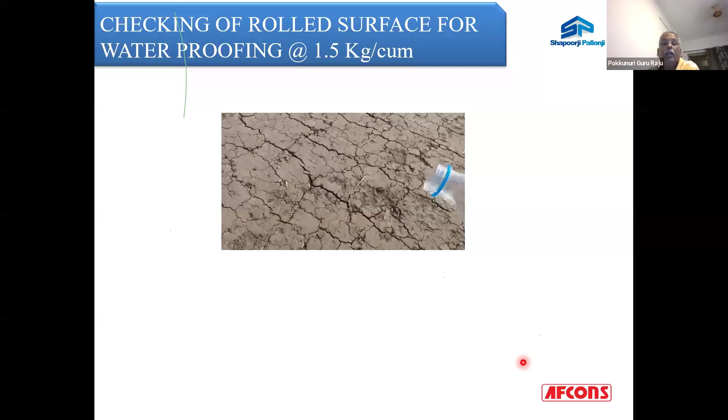This is a sample wherein 1.5 kgs of material is used for checking the effectiveness of the soil stabilization. You can see there are cracks available, of course, because of the black cotton soil. But you can see the water is not getting inside the soil, and the cracks are not getting penetrated by the water material. So this is the impact or effect of this material which we have seen during the trial stage.

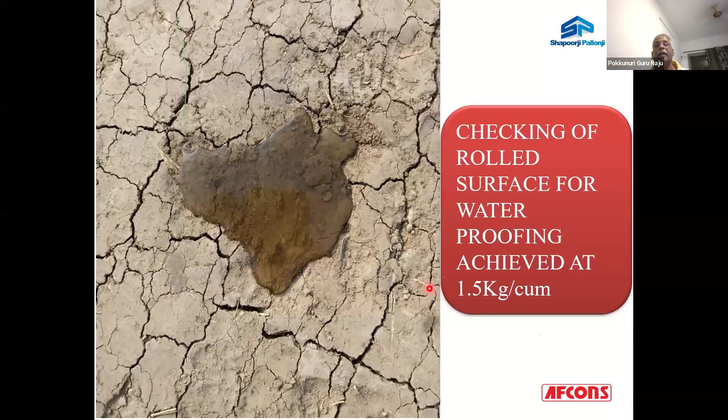The idea is this check needs to be performed at regular intervals. Without this test, you will not be able to ensure whether your CBR is going to be achieved, because everybody knows black cotton soil in dry condition has a good CBR value. The purpose of treatment is to make the black cotton soil water repellent in nature, and if this test fails, the entire stabilization process is at stake.

So in this particular scenario, what is important is the ripper and the rotavators. What the ripper does is plow the field and do the initial breaking, and then you use the rotavator to pulverize the soil, mixing it mechanically and chemically.

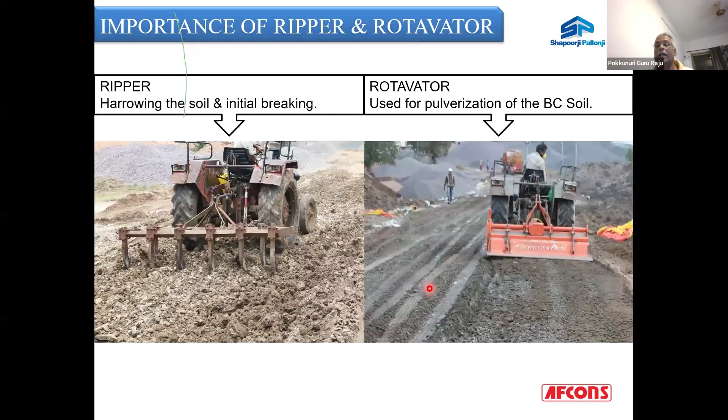If you see how the rotavator reacts, or its action stage by stage, you can see the particle size here. Now the rotavator is moving, and finally you can see the size of particles on top of the soil. This is what is desired for the treatment, and this can be achieved once lime is added. Once you achieve this soil condition, you can add your chemical, then roll it and compact it.

The controls required: the initial moisture content of the BC soil needs to be close to 5%, because the chemical is directly mixed into the soil, and if the BC soil has higher moisture, the chemical will get diluted and you will not achieve the required strength. At the same time, if the initial moisture is higher, it's better to add the lime first, wait a day, and then add the chemicals the next day, because lime acts as a water absorber and also allows the material to dry quickly.

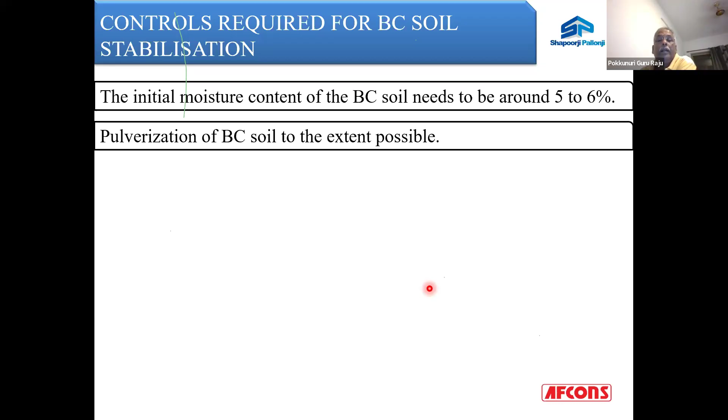Pulverization is the critical point to be observed in soil stabilization, along with spreading, absorbing moisture, further breaking of particles, and use of rotavators for mixing soil and lime in the field.

When you do the test, the hole created by the sand replacement method needs to be filled with suitable material of the same type, otherwise it becomes a critical area for water ingress. You need to make sure you are not allowing any water ingress into the soil section, because the moment water enters the soil, the shear strength between particles reduces, impacting the strength of the particles.

You can always go for a DCPT, dynamic cone penetration test, in the field, which uses a smaller rod of about 10-15 millimeter size that needs to be penetrated, and it will give you a logical CBR value.

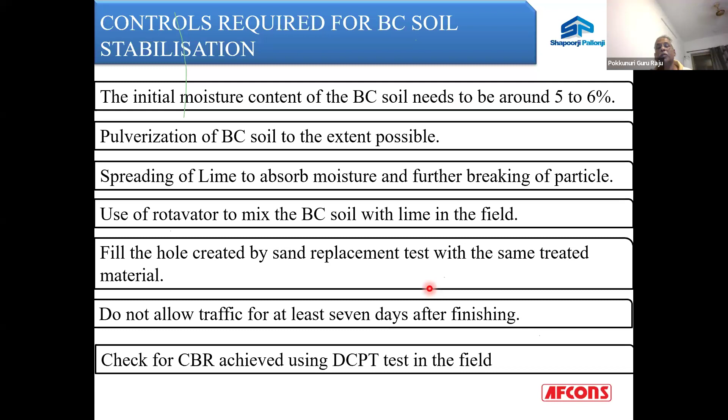If you look at the benefits, similar to soil stabilization, it enhances strength, lowers permeability, lowers compressibility, and develops the water repellent nature of the soil. This basically eliminates the defects caused by the presence of water in the soil.

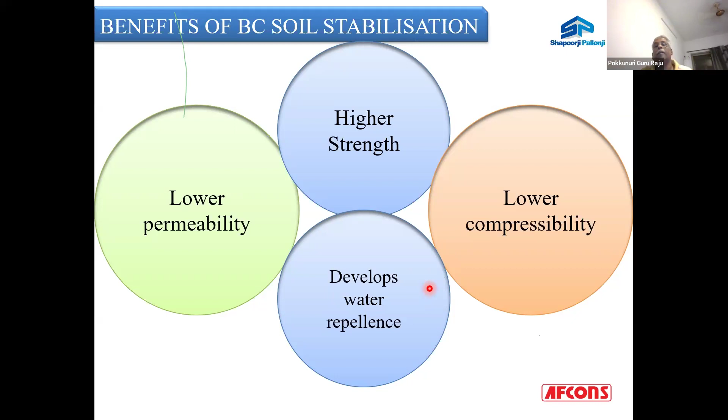So you can enhance the quality of the soil layers and control soil disintegration. It allows you to quickly dry the soil layers after a downpour and resolve critical subsurface issues. So that is the end of my presentation.